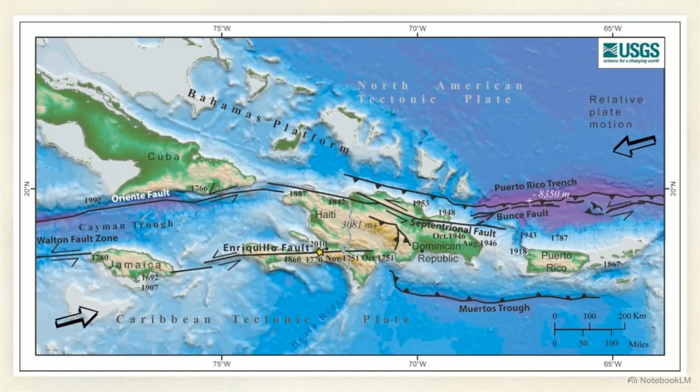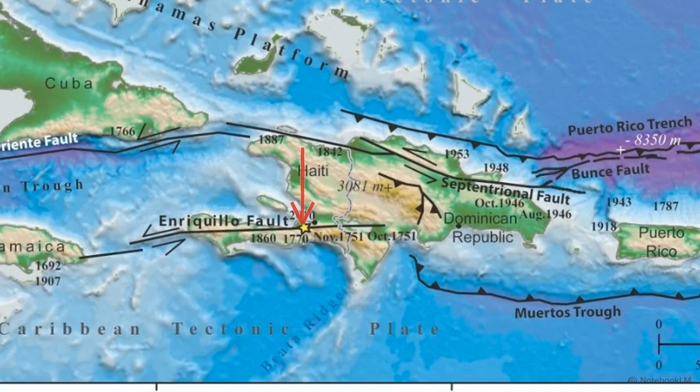This map shows the tectonic boundary between the Caribbean and North American plates. On January 12, 2010, a magnitude 7.0 earthquake ruptured exactly here, violently shaking the Republic of Haiti. The resulting devastation was catastrophic. Over 217,000 people were killed, and 1.2 million residents were displaced among the ruins of Port-au-Prince.

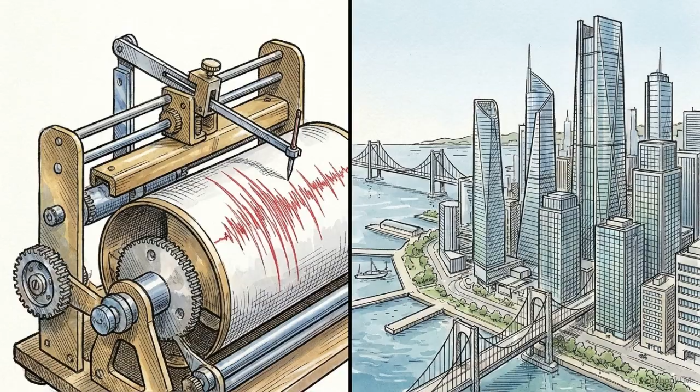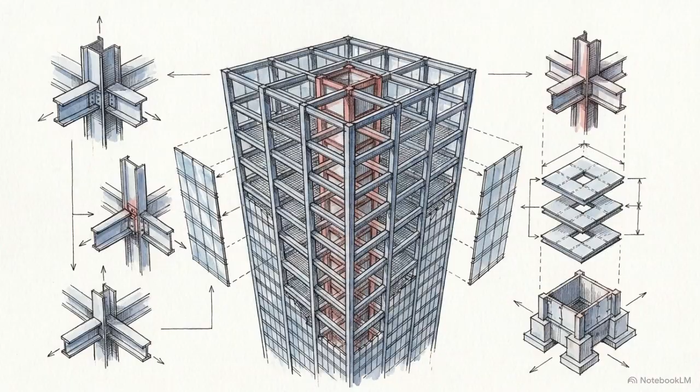A magnitude 7.0 earthquake is a major geological event, but it is not rare. The planet averages about 15 quakes of this size every year, yet they rarely produce this level of mass casualty in modern engineered environments. Port-au-Prince suffered extreme, disproportionate devastation compared to similar seismic events worldwide. The answer requires looking past the top-line magnitude. To understand this disaster, we must treat it as a complex, multivariable engineering equation.

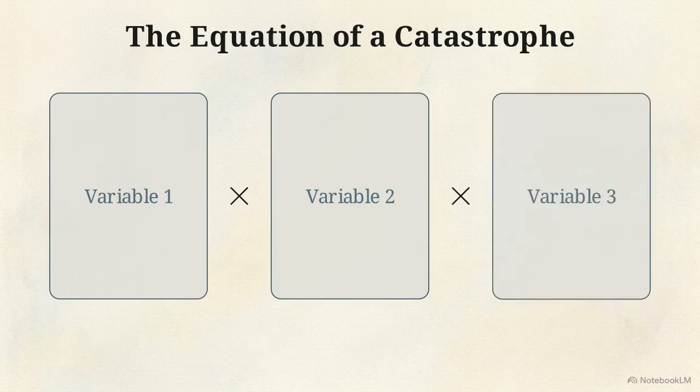The first variable is the seismic source itself, an abnormally compact, intensely concentrated energy release. The subsequent variables are the vulnerable alluvial soils lying directly beneath the city and a built environment engineered with almost zero lateral force resistance. To understand the true cause of death, we must trace the precise path of that energy, starting deep within the crust at a blind fault rupture and following it upward until it shatters the failing concrete columns of the city. We begin at the geological baseline.

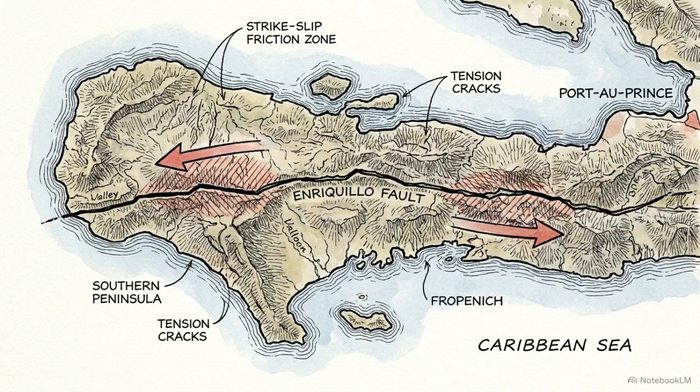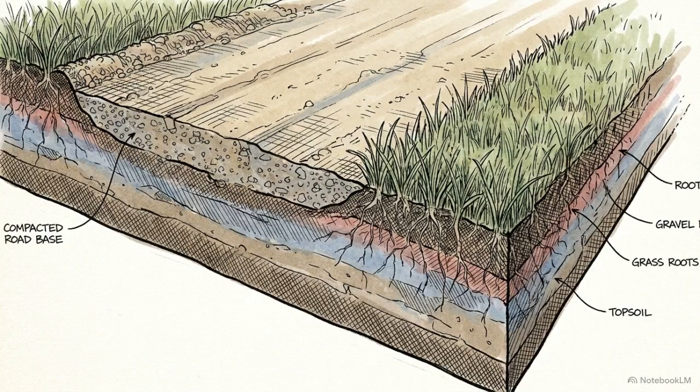The Enriquillo Fault is an active strike-slip boundary running right through the southern peninsula of Haiti. But when reconnaissance teams surveyed the area immediately following the 2010 event, they found zero evidence of surface rupture anywhere along that mapped fault line. This lack of physical tearing at the surface indicates the slip happened entirely underground, likely on an unmapped blind fault strand running adjacent to the main boundary.

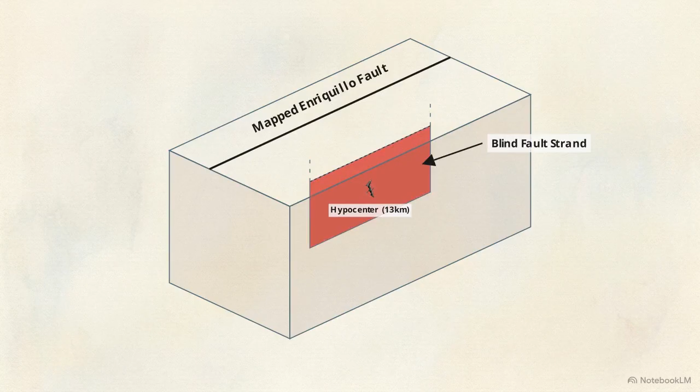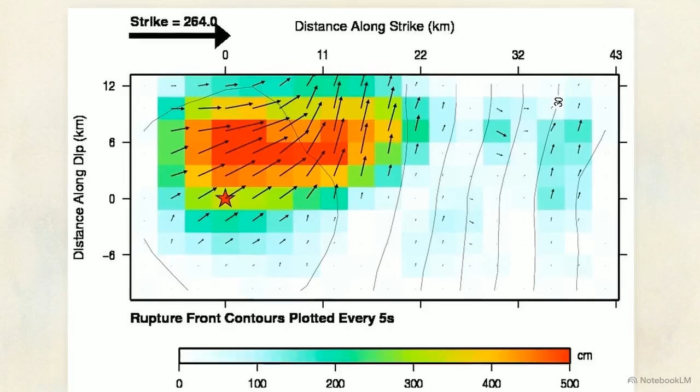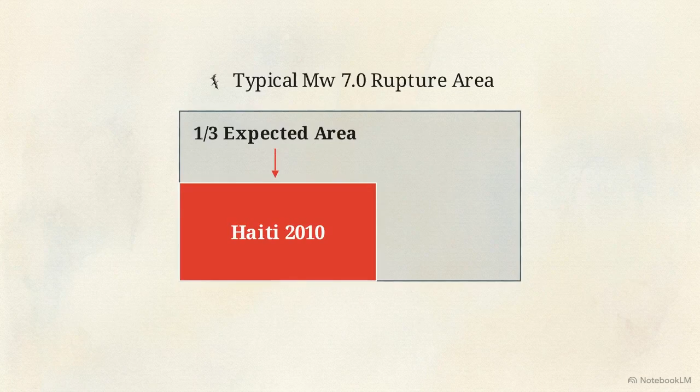This is the USGS finite fault model. It maps the exact distribution of tectonic slip across that subsurface fault plane. The concentrated red and orange areas indicate maximum slip. This active zone measures roughly 15 kilometers deep by 30 kilometers long. That surface area is remarkably compact, measuring roughly 1/3 the size typically expected for a magnitude 7.0 energy release.

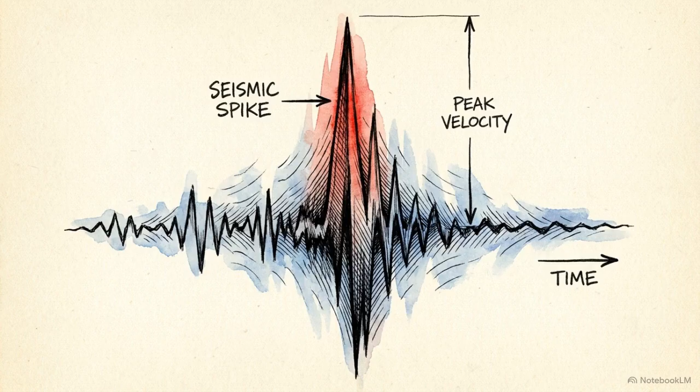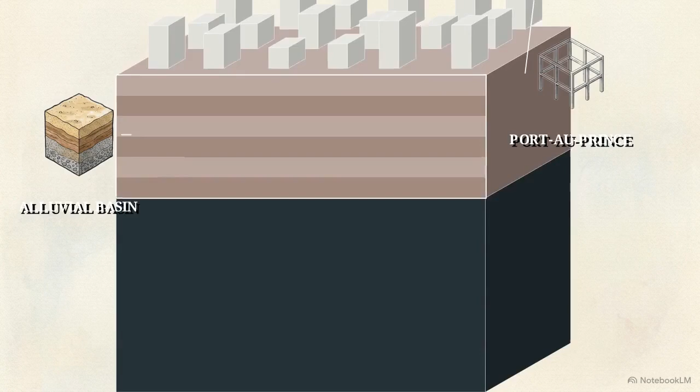Forcing that massive amount of tectonic energy through such a highly restricted space changes the mechanics of how the fault moves. Instead of a prolonged release, this spatial compression forced an incredibly abrupt and sharp rupture event. The vast majority of the fault's moment release occurred entirely within the first 10 seconds of the slip. This sudden, violent energy spike generated highly destructive, high-frequency seismic waves. The city took the full impact of an ultra-condensed blast of high-frequency kinetic energy, concentrated into a single violent 10-second spike. As those high-frequency waves traveled upward, they encountered the specific soil profile resting right beneath Port-au-Prince.

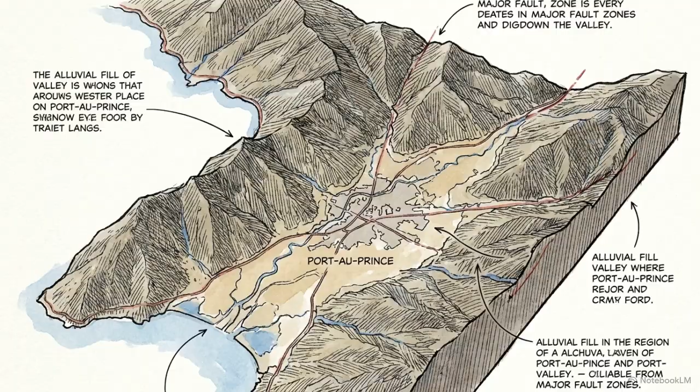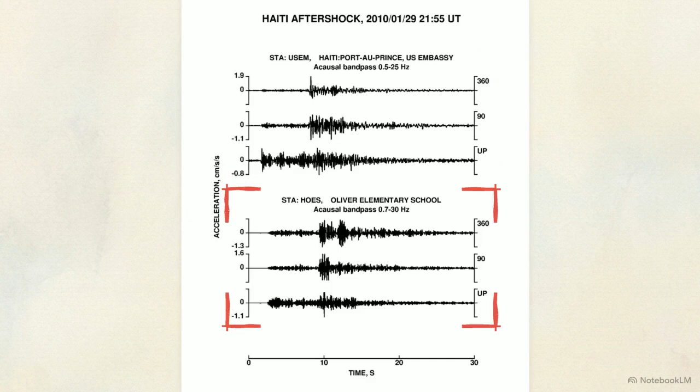The city sits directly on the cul-de-sac plain, a deep geological basin filled with Holocene alluvial fan deposits. These deposits consist of unconsolidated gravel, sand, and clay, reaching depths of up to 200 meters. This graph shows acceleration data from 2 seismographs. The top traces, recorded at the U.S. Embassy on deep alluvial soil, show a long duration of shaking. Compare this to the bottom traces from Oliver Elementary, a hard rock site, showing a much shorter burst. The deep alluvial basin acted as an acoustic amplifier. It trapped the seismic waves, modifying their frequencies and significantly prolonging the violent shaking.

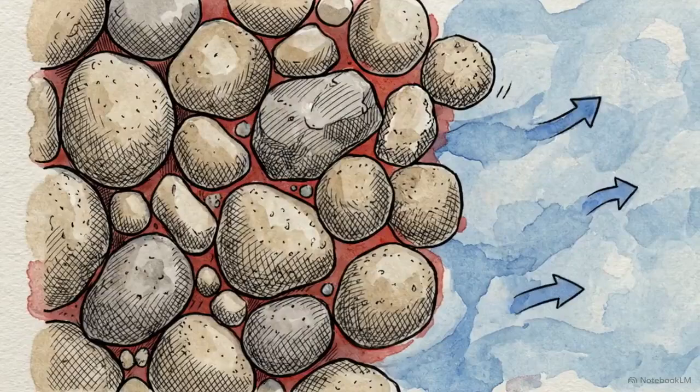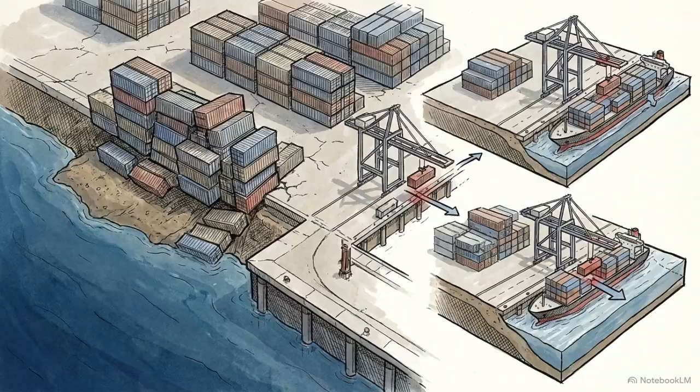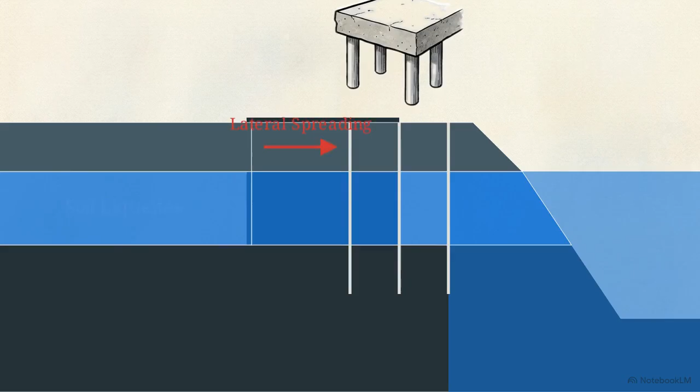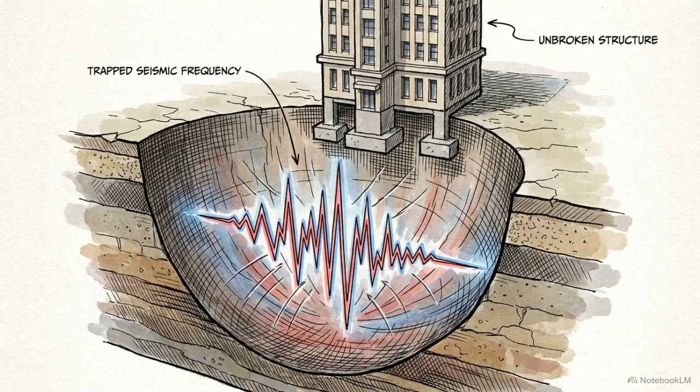Under prolonged vibration, water pressure forces saturated soil particles apart. The solid ground temporarily behaves exactly like a flowing liquid, a process known as liquefaction. This loss of soil strength had severe physical consequences for the heavy infrastructure resting on top of it, specifically the vital port facilities located on the water. The main port's North Wharf suffered a catastrophic collapse, instantly cutting off the delivery of heavy relief supplies to the city. The failure here was driven by liquefaction-induced lateral spreading. The liquefied soil physically tore apart and slid horizontally toward the water, dropping the pile-supported pier down with it. Before a single building's structural integrity was even tested, the deep basin had already weaponized the seismic waves, stretching their duration and turning the city's foundation into a fluid liability.

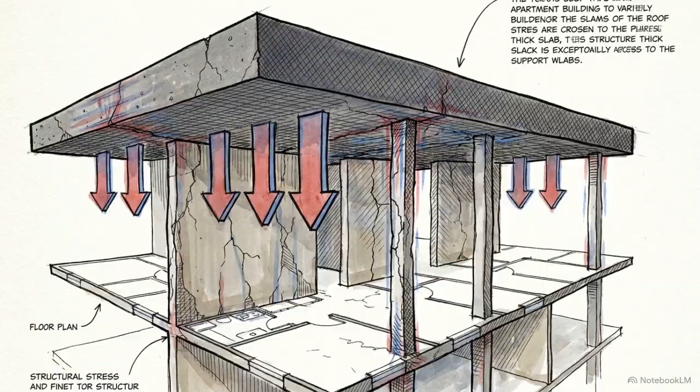That brings us to the final variable of the equation, the engineered structures resting on top of that amplified soil. According to Haitian government statistics, 71% of all multi-story homes and apartments in the area featured heavy concrete roofs. The standard Haitian structural frame paired thin reinforced concrete columns with a massive concrete roof slab, utilizing concrete block masonry as infill walls. The problem begins with the mass at the top.

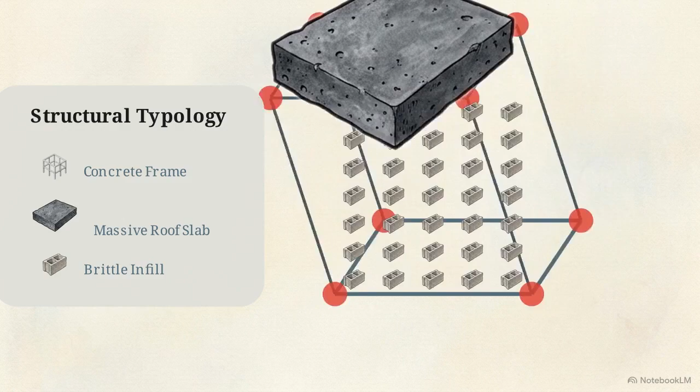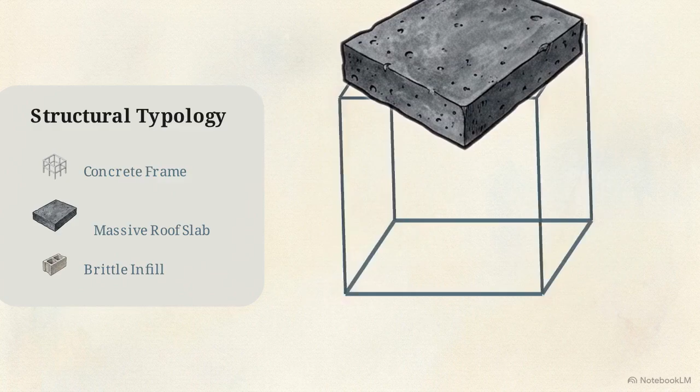As the ground aggressively accelerates, the heavy roof tries to remain static, generating immense lateral inertial forces dragging across the frame. The masonry block infill provides stiffness, but is highly brittle. It absorbs the initial shock, but shatters quickly as the frame severely deforms back and forth. The moment those stiff infill walls blow out, the entirety of that massive lateral shear demand is instantly transferred directly into the concrete columns, and this is where the system collapses.

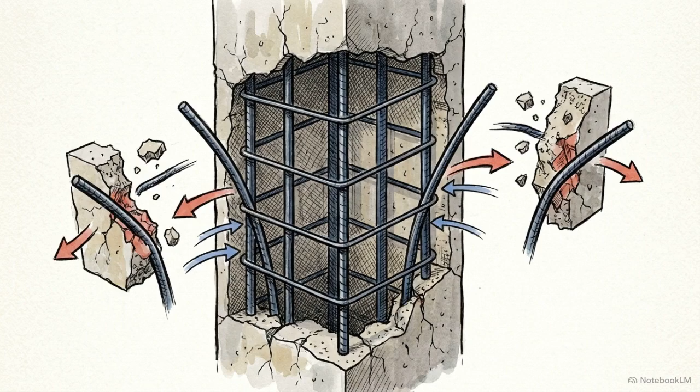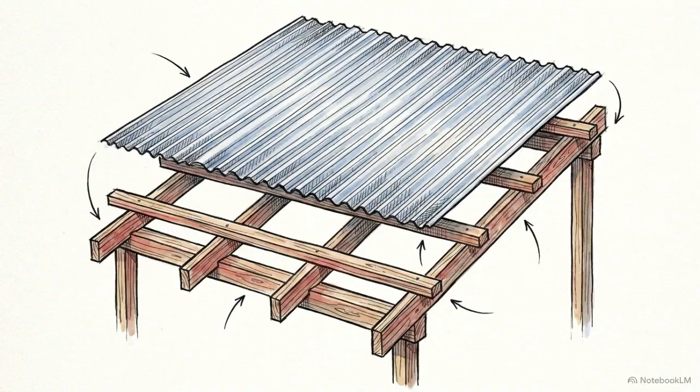The structural columns categorically lacked the necessary reinforcing details, specifically proper steel shear stirrups, required to handle sudden, immense lateral loads. This flaw scaled up to cause macro-level devastation at facilities like the Hotel Montana, where the columns failed and the heavy concrete slabs pancaked. We can validate this mechanical failure by looking at the structures that survived. Post-earthquake surveys revealed that buildings constructed with lighter timber or sheet metal roofs performed significantly better because they generated far lower inertial mass at the top of the frame. The massive collapse of the building inventory resulted directly from an architectural typology uniquely configured to catch lateral momentum and succumb to rapid, brittle failure.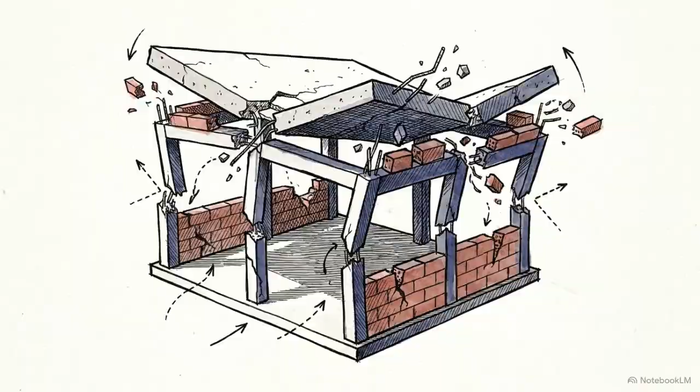The devastation in Haiti is the product of a brutal, compounded equation: a uniquely compact energy release, multiplied by deep basin amplification, multiplied by heavy, unreinforced concrete construction. Evaluating any single one of those factors in isolation fails to explain a death toll exceeding 217,000 people. It required all three factors aligning perfectly.

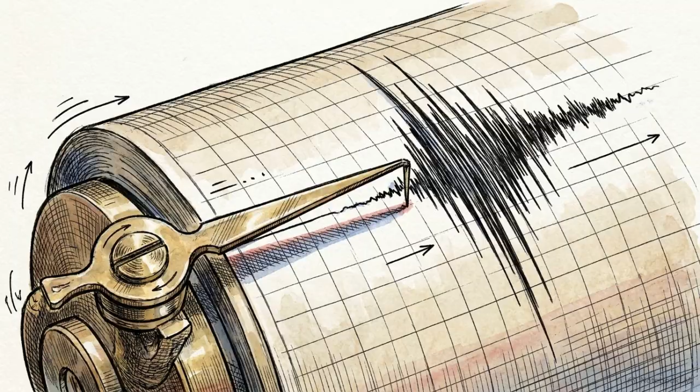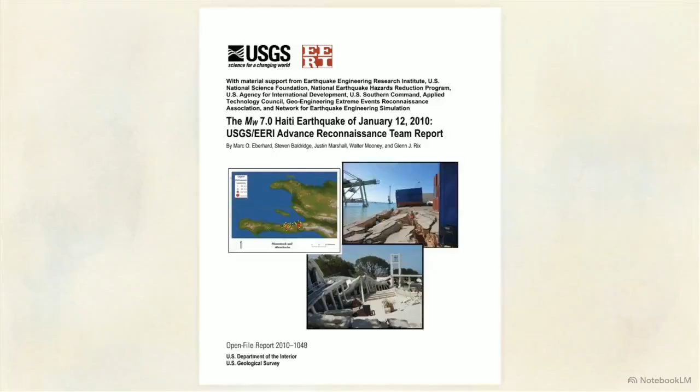Understanding this equation is critical because the geological threat remains active. Historical records show the Enriquillo fault system operates on a persistent, violent cycle, having previously leveled the region with massive quakes in 1751 and 1770. Reconnaissance teams issued a stark warning: an earthquake of magnitude 7.0 or larger could strike southern Haiti again at any time.

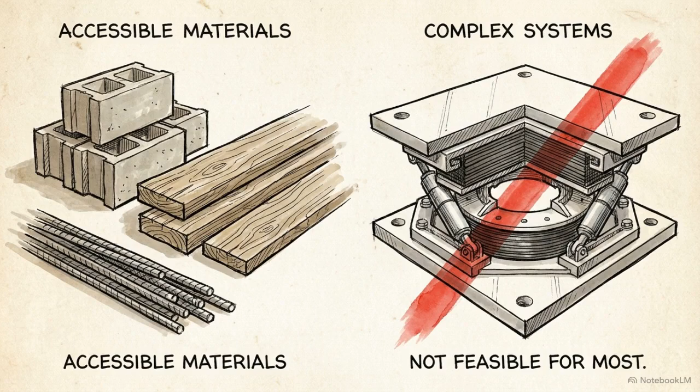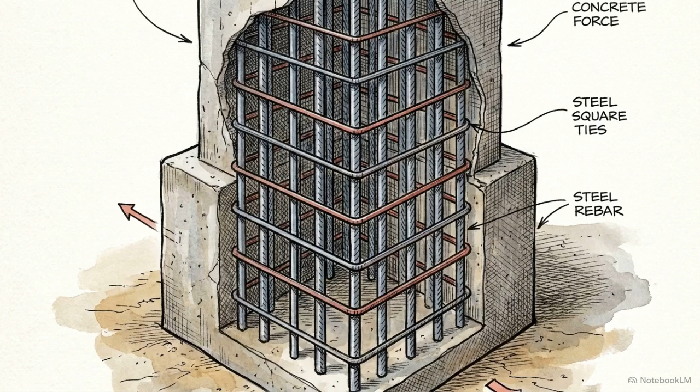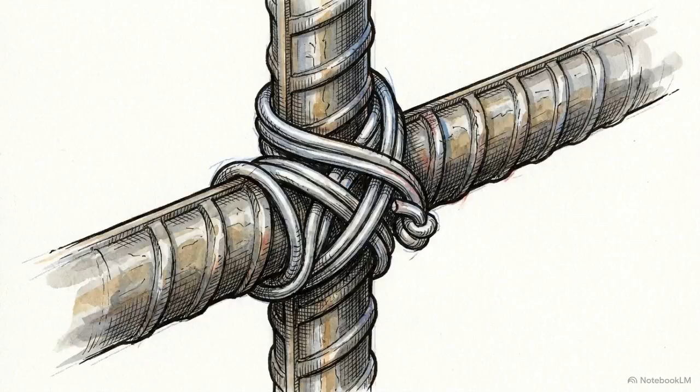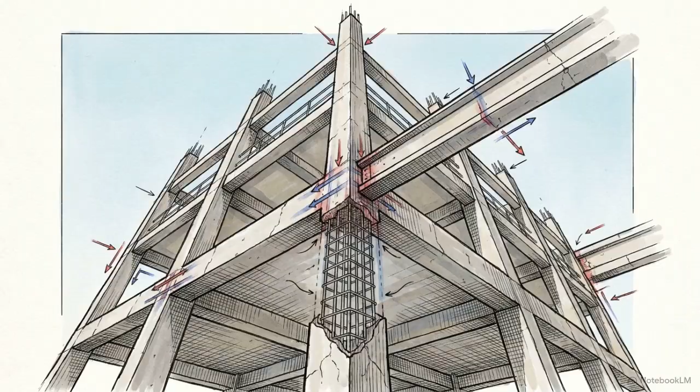The core engineering takeaway from this disaster is that surviving the next rupture does not require exotic or prohibitively expensive construction methods. The minority of concrete structures that actually survived the 2010 shaking did so merely because they possessed adequate stiffness and standard steel reinforcing details. Implementing simple, sound engineering practices, like opting for lighter roof materials and properly tying columns, is the ultimate defense against this recurring natural hazard. The 2010 Haiti earthquake serves as tragic proof that we cannot stop tectonic forces from snapping deep within the crust. But it is entirely our engineering choices on the surface that determine whether an earthquake becomes an apocalypse.